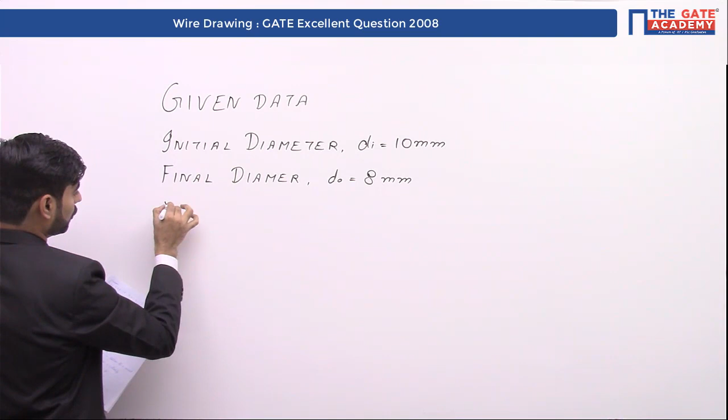Before we do any question, especially in manufacturing engineering, try to write down all of the information given to you. We have the given data: initial diameter DI 10 mm, final diameter D naught 8 mm, speed of drawing 0.5, yield strength of the material, represented by SYT, as 800 megapascal.

In the first question it is asking us what is the drawing stress. For drawing stress we have a very simple formula. Drawing stress is given as K ln AI by AF, where AI is the initial area of the wire and AF is the final area of the wire. Area refers to area of cross section of the wire.

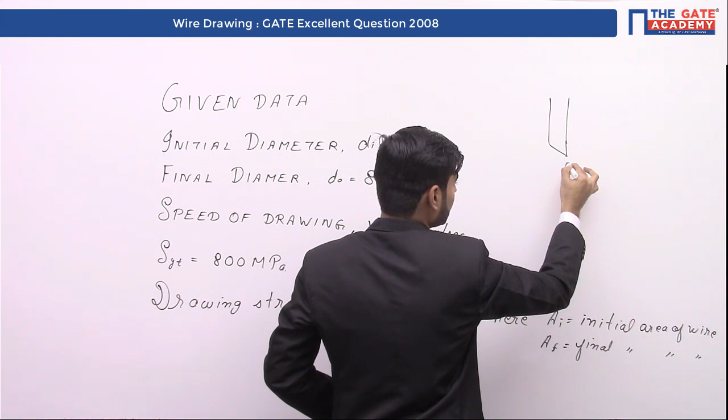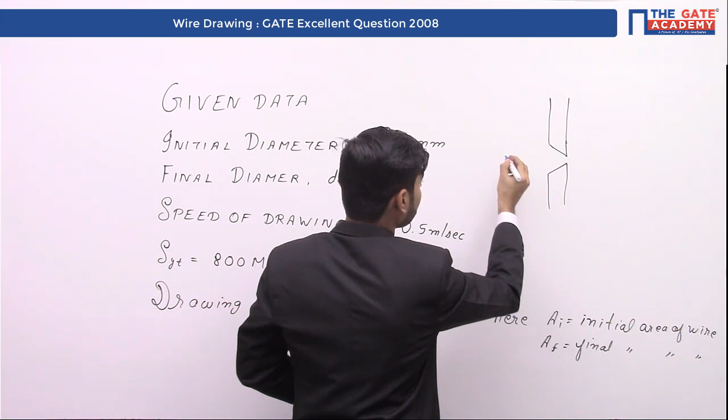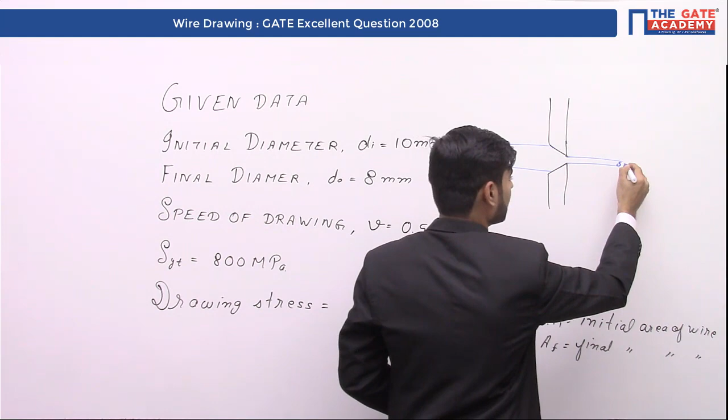So basically there is a die which is decreasing its cross section, and a certain wire is sent into this die whose area of cross section is reduced. AI refers to the area of cross section on this side and AF refers to the area of cross section at this end. As it is a drawing process, we apply the force on this end, which makes this a tensile force driven process.

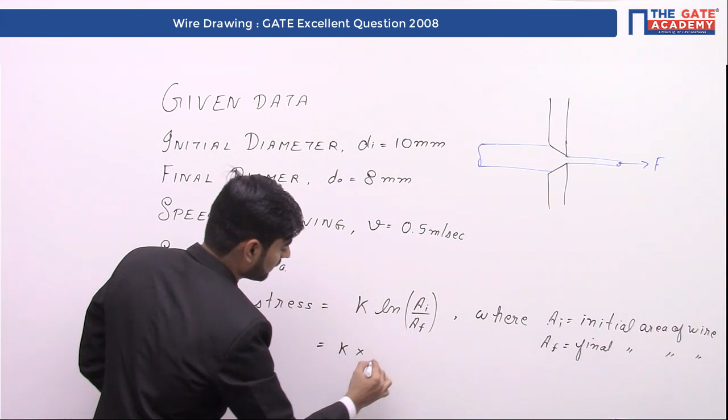So we can write it as K multiplied by ln (di by df) whole square, within the log, and further write it as 2K ln di by df. K refers to the yield strength of the material. So the drawing stress, represented by sigma d, is given by 2K ln di by df. All of this information is available to us: initial diameter, final diameter, and the K value, which is the yield strength of the material.

So let's put the values. Sigma d equals 2 into 800 multiplied by ln of initial diameter 10 over final diameter 8. After calculating, you will get 357.03 megapascal. So this is the answer to our first question. We have calculated drawing stress with the help of the simple formula, and option B is correct.

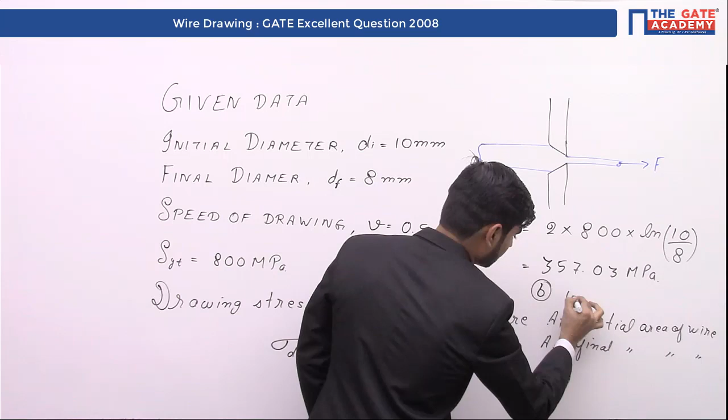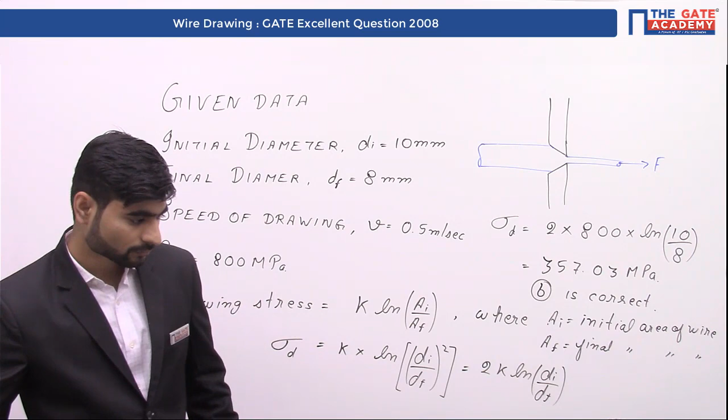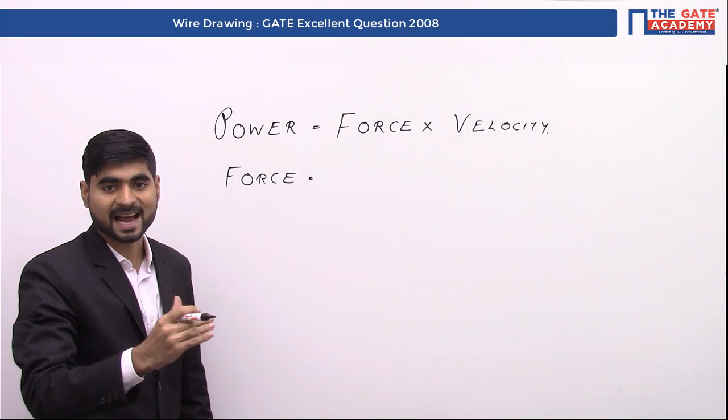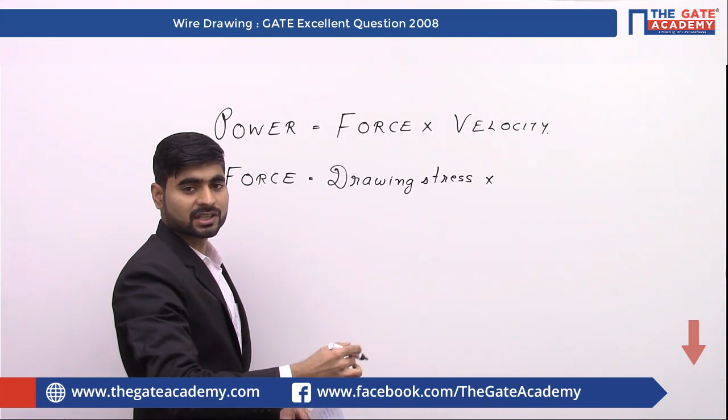Moving to the second part of this question, in which the power required for this drawing operation is asked. Let's write down the formula for power. We all know that power is given as force into velocity. What is force? We have already calculated the mean stress acting at the outlet end of the wire drawing operation, so force is the drawing stress multiplied by the final area of cross section at the outlet end.

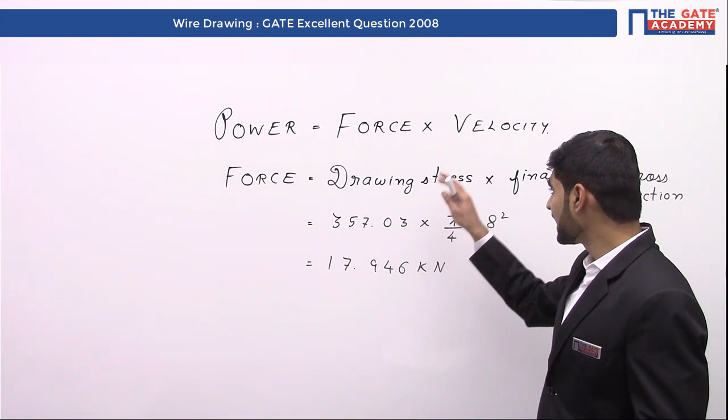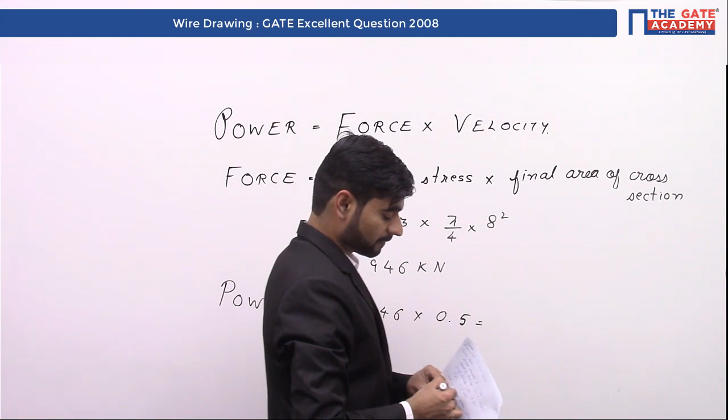The drawing stress, as calculated in the previous part, was 357.03, and the final area of cross section is pi by 4 multiplied by 8 square. Solving this, you get 17.946 kilonewton. We are already given the velocity, which is 0.5. So power is 17.946 multiplied by 0.5. Whenever you solve questions like this, the units are very important. Here it is kilonewtons, so the answer would be 8.9 kilowatts. Out of the given options, option A is correct.

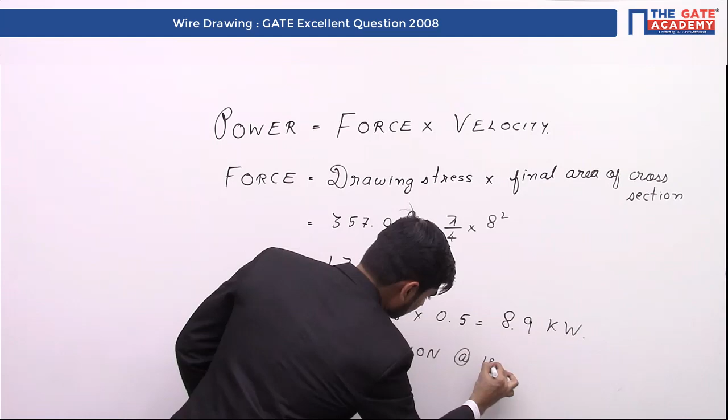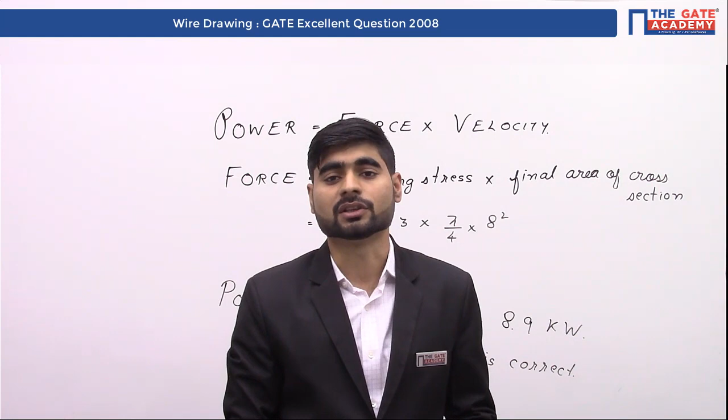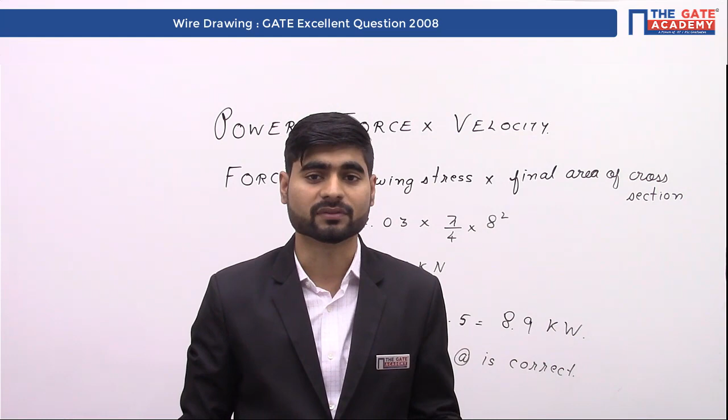I feel this question is very clear to you. The only formula we have used is the drawing stress formula, an empirical formula, to calculate the drawing stress, and after that we utilized the basics involved in the drawing process: it uses tensile stresses. The tensile stress is applied at the outlet end of the die to make the wire out of a given billet, so we used the final area of cross section. I hope it is very clear.